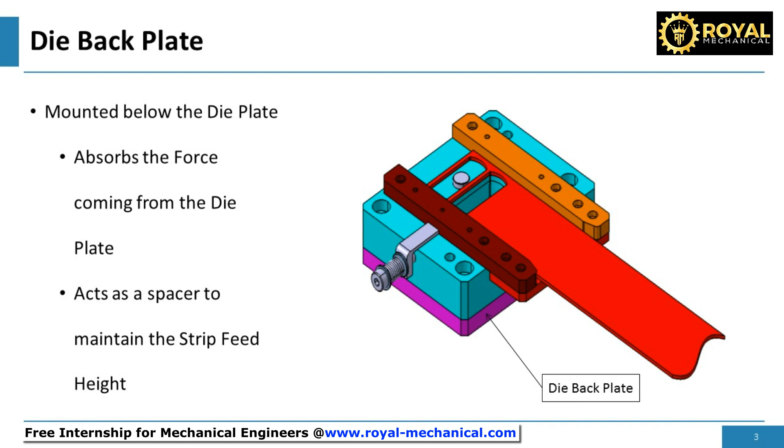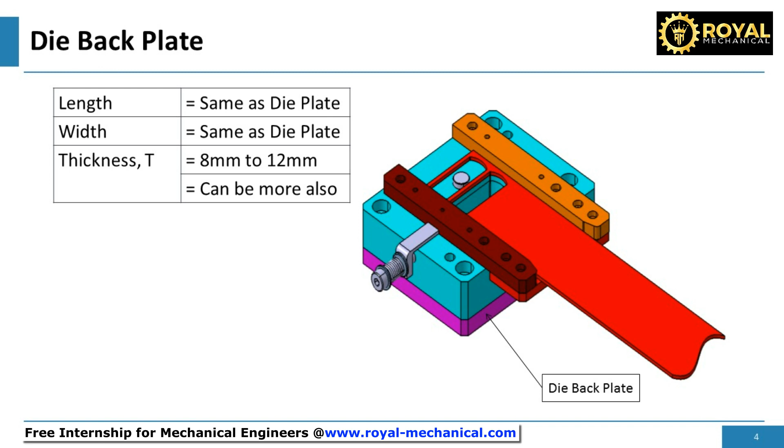The function of the die backplate is to absorb the force coming from the die plate. The die backplate also acts as a spacer to maintain the strip feed height; we will discuss this later. The length and width of the die backplate will be the same as the die plate. Generally, the thickness will be 8 mm to 12 mm.

Now let me demonstrate how to design the die backplate in CATIA V5. To design the die backplate, let's make use of the die plate. Right-click on the die plate and open it in a new window. Let's save this die plate as die backplate. Click on File, Save As. Don't forget to click on Save as New Document, as we need a new file named die backplate. Change the file name to die backplate, then save the file. Close the die plate.

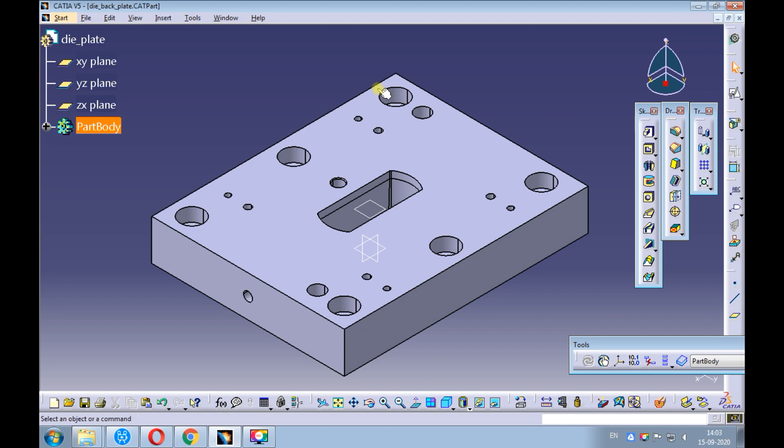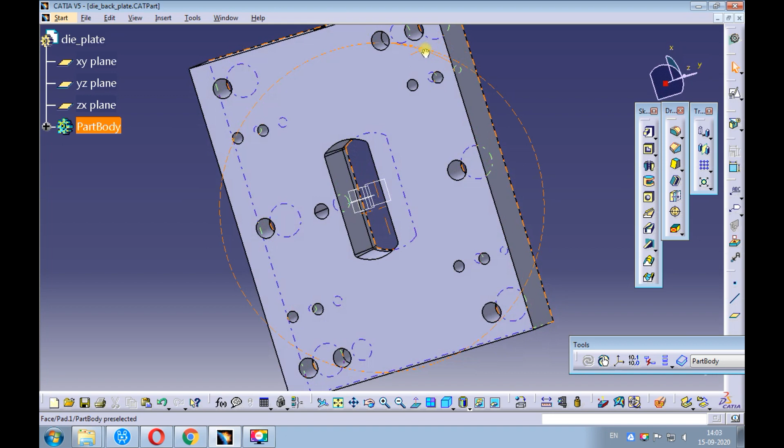Open the die backplate. Let's check what we have on the die plate. We have counter bore holes for fastening the die plate. We have dowel holes for locating the die plate and the corresponding relief holes on top of the dowel holes. We have threaded holes for fastening the strip guide plates. We have dowel holes for locating the strip guide plates. We have a hole for the locating pin. We have the die opening with a draft. We have the threaded hole for the strip pusher. We also have relief holes provided below the fastener and dowel holes of the strip guide plate.

Now let's modify everything and convert this die plate to die backplate. Let's redefine the counterbore hole provided for fastening the die plate into a simple hole. Right-click on the counterbore hole and select Center Graph. Observe the counterbore hole on the tree is highlighted, and it comes to the middle of the screen. Right-click on the counterbore hole and select Definition.

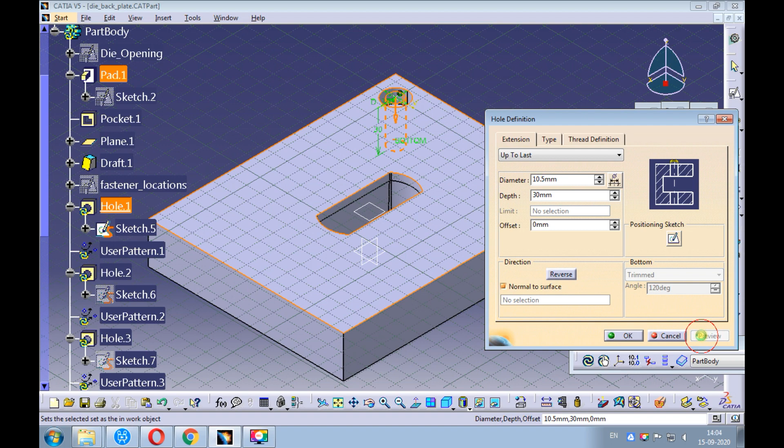Let's check the diameter of the clearance hole. It is 10.5 mm. We need to maintain the same hole diameter. Change the counterbore hole to a simple hole. Observe the diameter of the hole, it is 10.5 mm, and it is OK. Click on Preview, make sure the hole is getting created, and then click on OK. Observe all the counterbore holes are updated to simple holes.

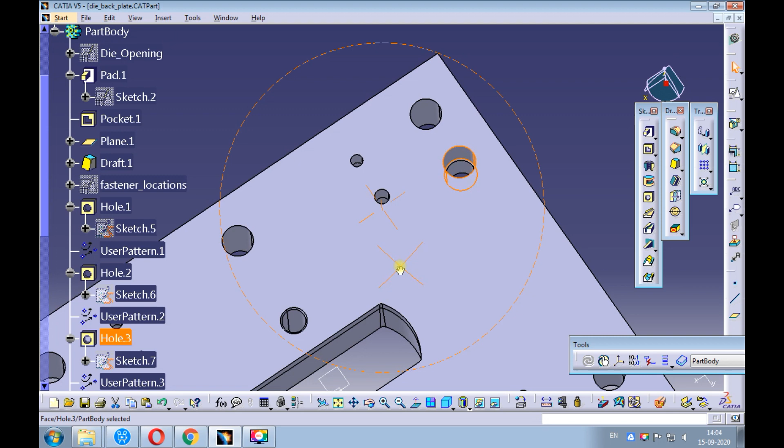Let's delete the relief hole provided for the dowel hole. Pick the relief hole and the user pattern associated with the hole. Hit the Delete button on your keyboard to delete them. A delete window opens. Uncheck the Delete Aggregated Elements. Pick OK.

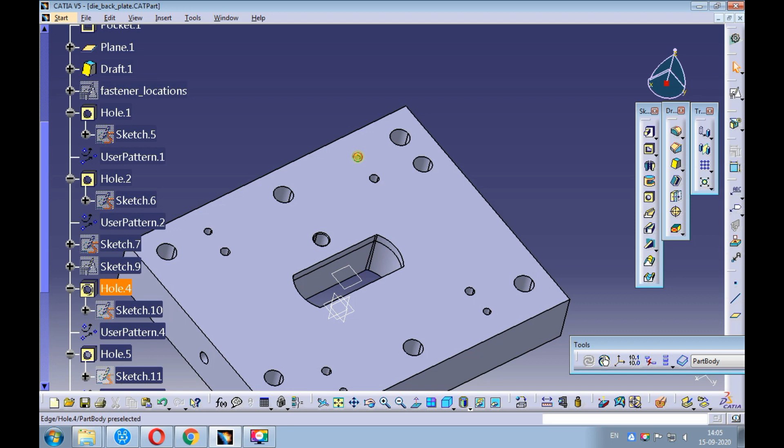Let's delete the threaded hole provided for the strip guide plate. Pick the threaded hole and the user pattern associated with the hole. Right-click and pick Delete. A delete window opens. Uncheck the Delete Aggregated Elements. Pick OK.

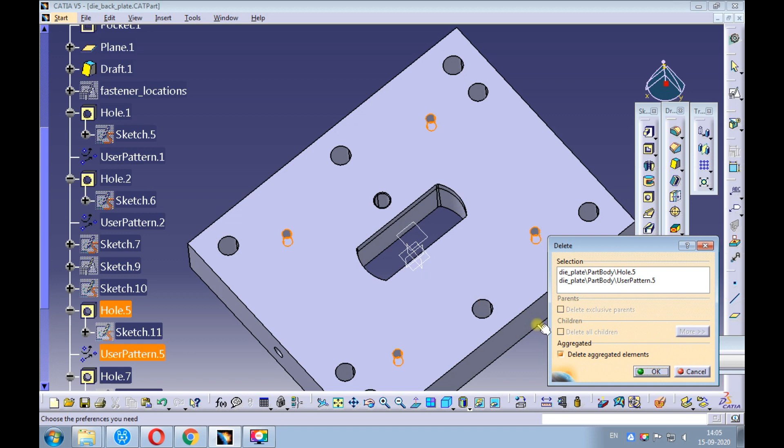Let's delete the dowel hole provided for the strip guide plate. Pick the dowel hole and the user pattern associated with the hole. Right-click and pick Delete. A delete window opens. Uncheck the Delete Aggregated Elements. Pick OK.

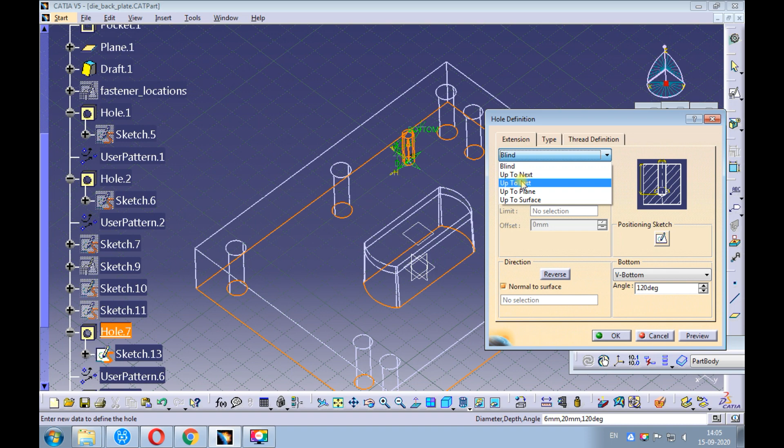Change the view display to wireframe. Let's redefine the relief hole provided for the threaded and dowel holes of the strip guide plate. Right-click the relief hole and pick Definition. Change the hole extension from blind to up to last. Click on Preview, make sure the hole is getting created, and then click OK.

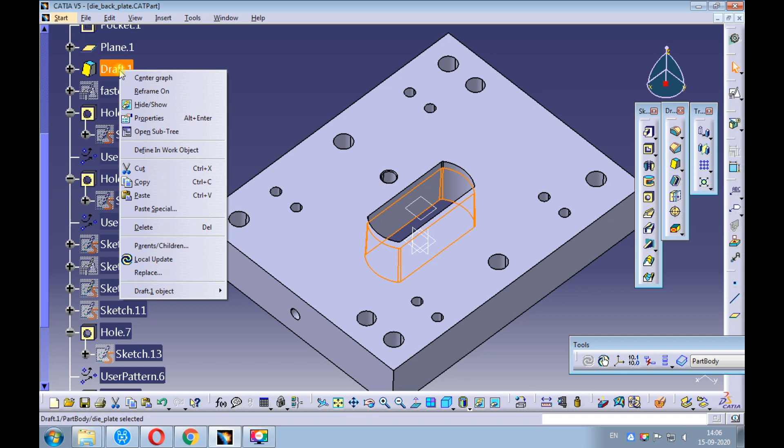Change the view display to shaded with edges. Let's delete the draft provided for the die opening. Right-click on the draft and select Delete. A delete window opens. Pick OK.

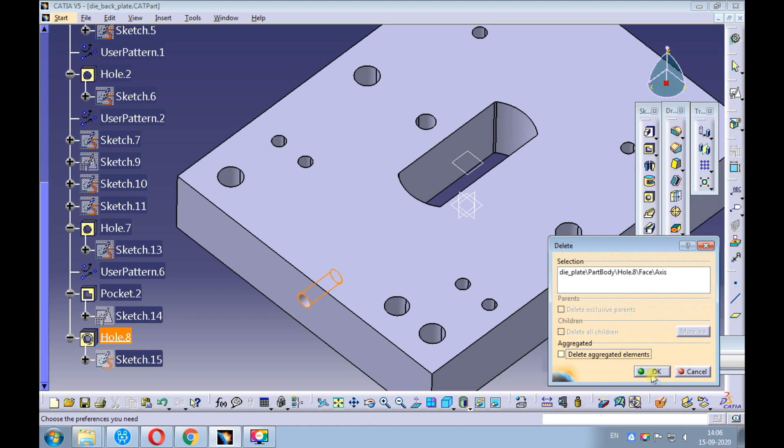Let's delete the chamfer provided on the locator pin hole. Right-click on the chamfer and select Delete. A delete window opens. Pick OK. Let's delete the threaded hole provided for the strip pusher. Right-click on the threaded hole and select Delete. A Delete window opens. Uncheck the Delete Aggregated Elements. Pick OK. We need to slightly increase the size of the die opening and the locator pin's hole size.

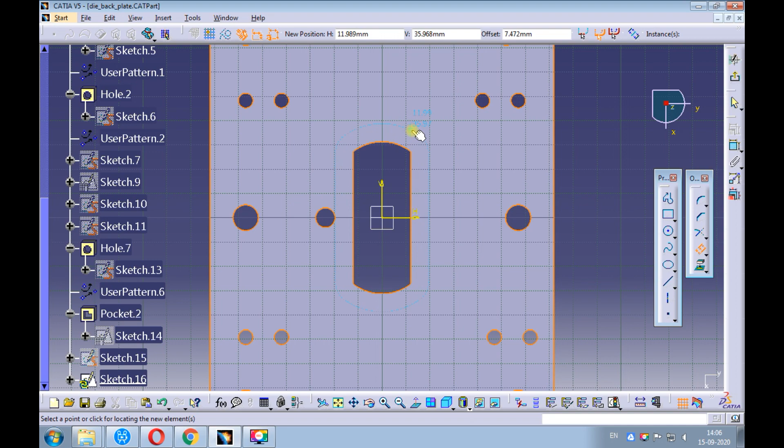Create a position sketch on the top surface of the die plate. Pick the Offset command. Make sure the tangent propagation is selected. Select the die opening. Create an offset curve towards the outside of the die opening. Change the value to -1.

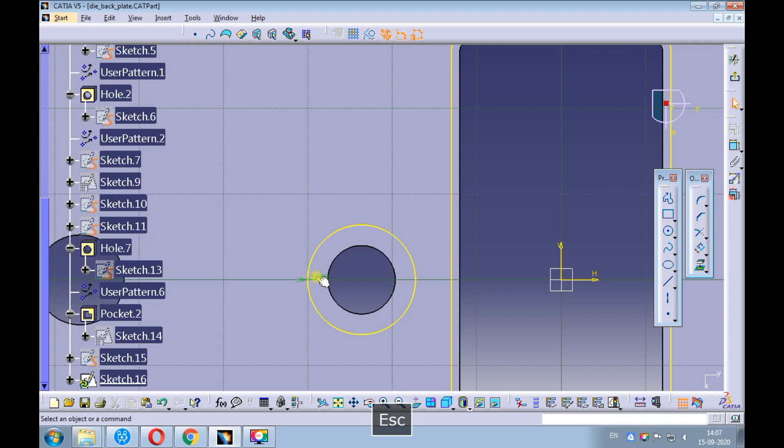Pick the Offset command. Make sure the tangent propagation is selected. Select the hole for the locator pin. Create an offset curve towards the outside of the hole. Change the value to -1. Make sure the sketch is fully constrained and exit the Sketcher workbench.

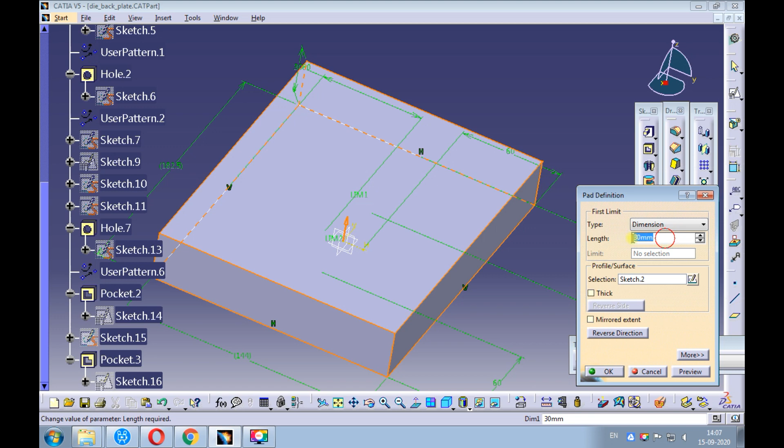Make a cut in the die plate using the Pocket command and up to last option. Click on Preview, make sure the pocket is getting created, and then click OK. Double-click on the die plate and change the thickness to 30 mm. Click on Preview, make sure the thickness is getting updated, and then click OK. We have successfully converted the die plate to die backplate with all the updates we made on the die plate.

Set the view to isometric and fit all in. Save the die backplate.

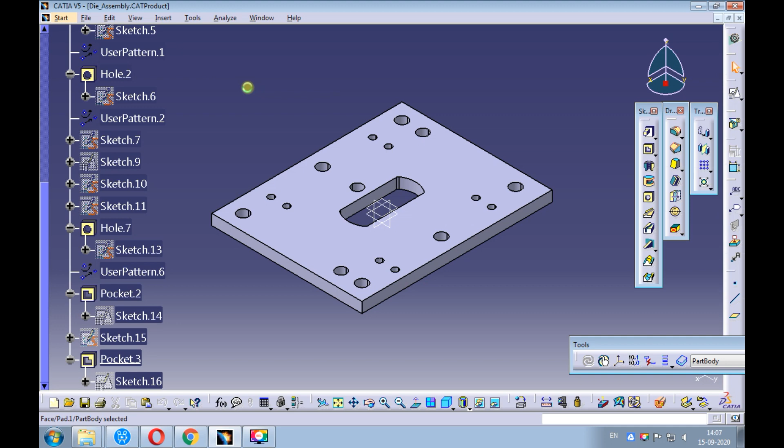Swap the window to die assembly. Let's assemble the die backplate to the die assembly. Click on the existing component command. Pick product 1, which is the die assembly. Pick the die backplate from the file selection window.

We have a part number conflict. Remember, we had saved the die plate as die backplate. Hence the part number on the die backplate is the same as the die plate. We should have changed it. Anyhow, nothing to worry. We can change it now.

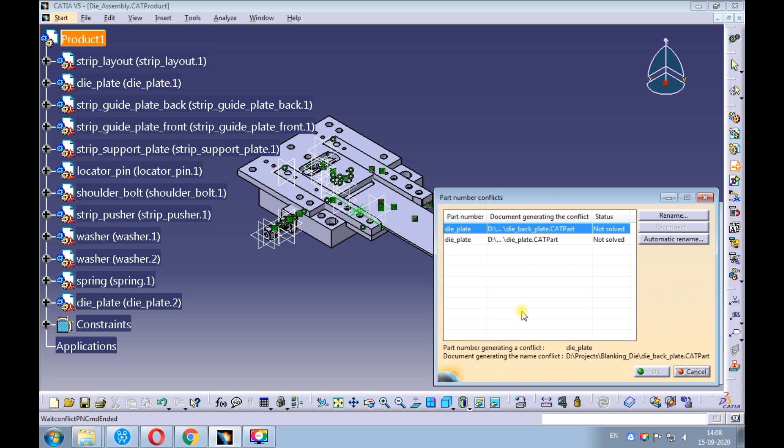Select the die backplate. Click on Rename. Enter the new part number as die backplate. Click on OK. Observe the part number of die backplate got updated. Click on OK.

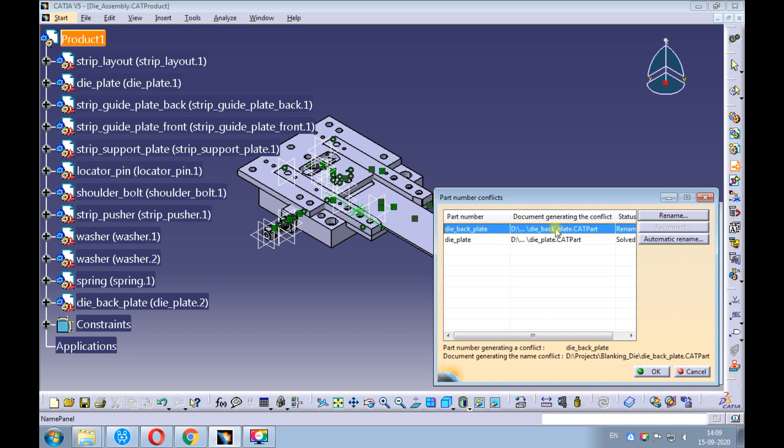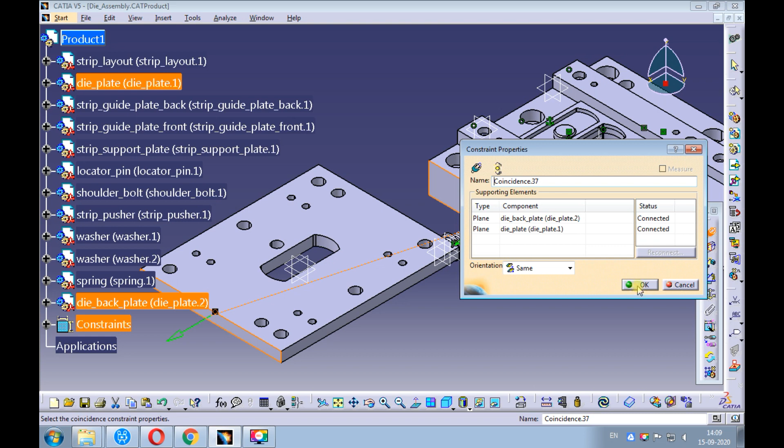Use the manipulation command and drag the die backplate. Provide a coincidence constraint between the die backplate's front surface and the front surface of the die plate. Provide a coincidence constraint between the die backplate's right surface and the right surface of the die plate. Provide a surface contact constraint between the die plate's bottom surface and the top surface of the die backplate.

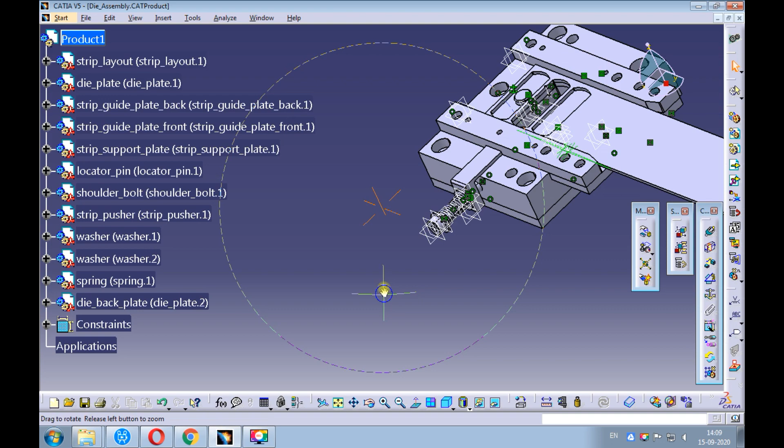Update the die assembly. Observe the alignment of holes.

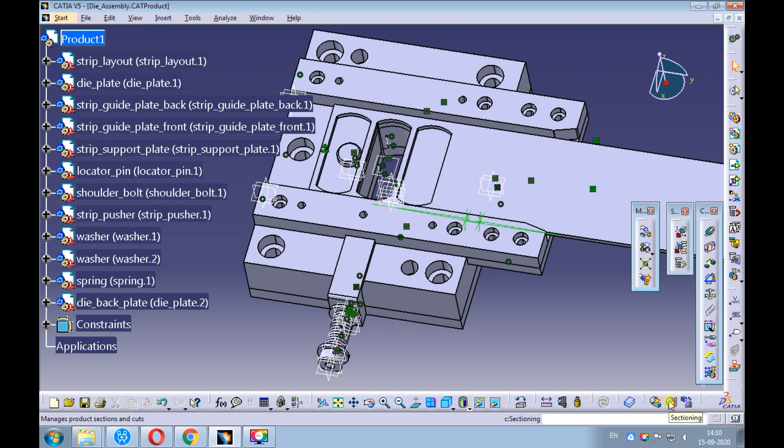Click on Sectioning. Pick the tab result. Pick on Volume Cut. Observe the assembly got cut on the front YZ plane. Observe the holes are aligned correctly.

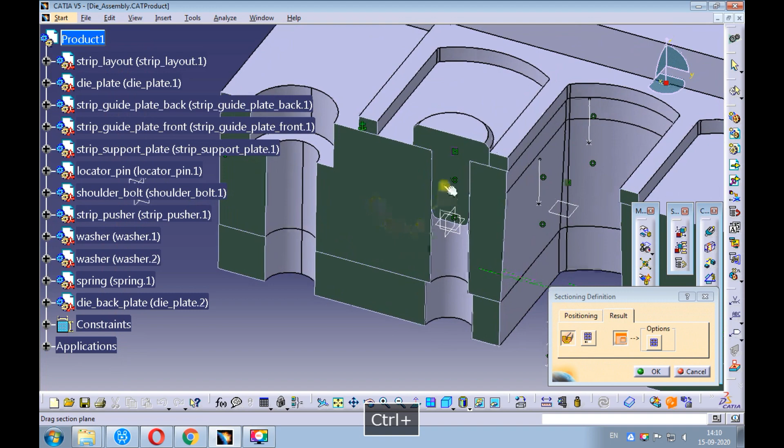Also observe there are two diagonal lines. You can pick on the diagonal lines and move the sectioning plane. You can position the sectioning plane wherever you want and check the assembly.

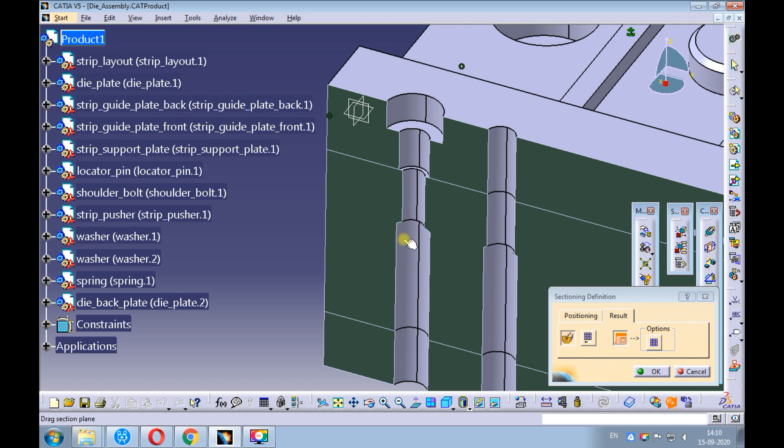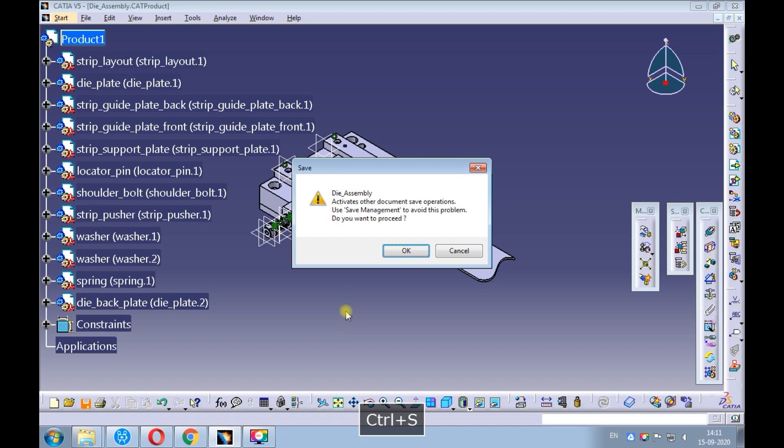Click on Cancel to exit the sectioning command. Set the view to isometric and fit all in. Save the die assembly. With this, we have successfully designed the die backplate.